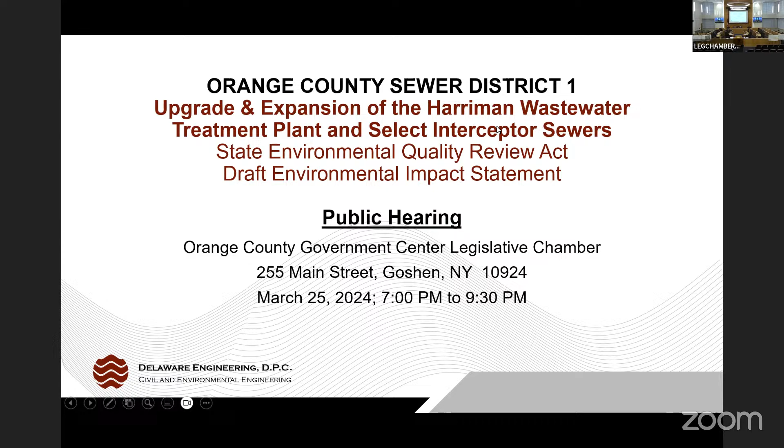So my name is Mary Beth Bianconi. I'm a partner here at Delaware Engineering, working with the county for about the past decade, evaluating the wastewater treatment plant that is part of the Orange County Sewer District Number 1, located at 71 River Road in Harriman, as well as portions of the collection system owned by the Orange County Sewer District.

We're here tonight to conduct a hearing on a draft environmental impact statement, copies of which are here in front of us. This is the text, and then there are two appendices. The document is well over 3,000 pages long and represents years of study and effort, and has been reviewed by the legislature and is ready for public review tonight.

Tonight, we'll walk through the state environmental quality review process so we can understand what that is. We'll discuss the proposed project. We'll describe the draft environmental impact statement, and then also discuss the comment process that we're in at the moment.

So the State Environmental Quality Review Act is a process through which projects that may have an impact on the environment are evaluated before they occur. The purpose is to describe the environmental setting of the proposed project, identify environmental impacts, mitigation measures that reduce or eliminate potential environmental impacts, explore alternatives to the proposed action, and establish a framework under which the project may advance to construction.

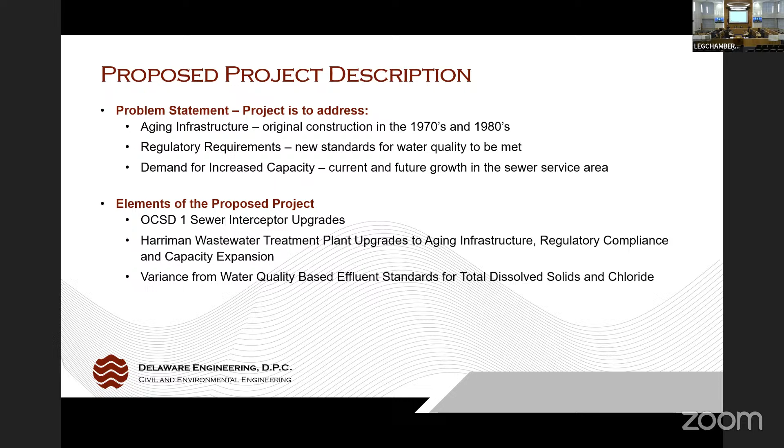The treatment plant was built in phases. We do have an image of the treatment plant here in the room—if anyone can see it, should we stop?

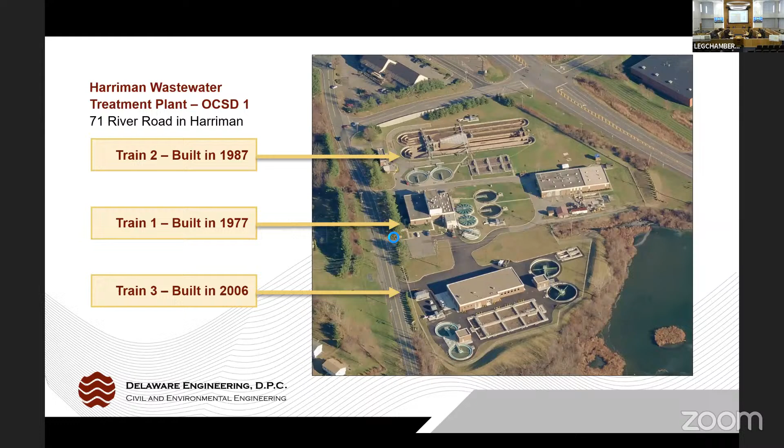We're ready. Thank you. Yep.

So we were just discussing that this is the Harriman Wastewater Treatment Plant at 71 River Road in Harriman. The plant was built in 3 phases, with Train 1 in the center, built in 1977, and Train 2 at the top of this image, built in 1987. The difference between 1977 and 1987 was the addition of some communities to the service area, the Moodna communities, so additional capacity was necessary. Each of those trains was constructed as a 2 million gallon a day train, so by 1987 this was a 4 million gallon a day facility.

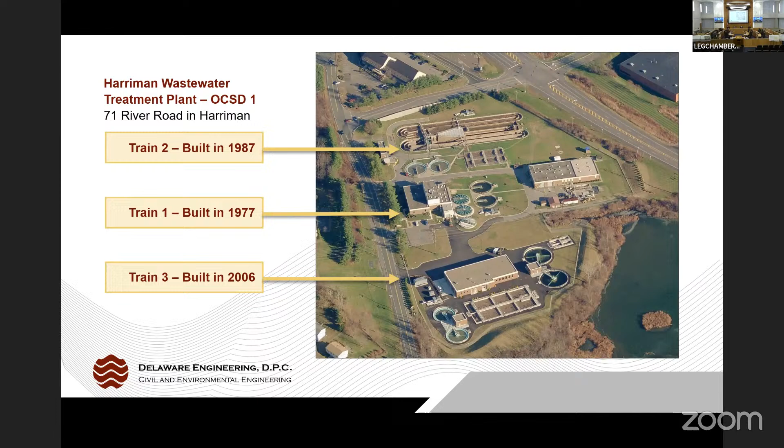Then about 20 years later, in 2006, an expansion was built, at the bottom of this picture, which added another 2 million gallons a day. One of the things you may notice from this image is that there are 3 different types of technologies that make up the wastewater treatment plant on this site. That's a little unusual, but today the capacity is 6 million gallons a day. The other thing I'll point out is that the space between Train 1 and Train 3 is actually utility right-of-way, which adds a little bit of complexity to working on this site.

In 2020, the permit that governs the quality of the water treated at the wastewater treatment plant and discharged to the Ramapo River was updated to include new requirements for treatment. This is a pretty long list, but I'll summarize it to say that some of these treatment requirements have to do with the biological process at the wastewater treatment plant and its ability to consume organic matter. Some are relative to the ability to reduce the amount of nutrients being discharged into the water, so things like nitrogen and phosphorus.

Some of them are for constituents that we typically find in groundwater in the area, particularly in our hard groundwater.

So those things would include something called total dissolved solids, abbreviated TDS, and chlorides, which are a constituent of total dissolved solids. In addition, the permit was updated to include the state's mercury minimization program, which is an element of all wastewater treatment plant discharge permits these days. A number of other monitoring requirements, including whole effluent toxicity testing, were added to ensure the wastewater discharged from the plant isn't toxic in the environment. There were also some other administrative improvements to the permit, as well as additional sampling.

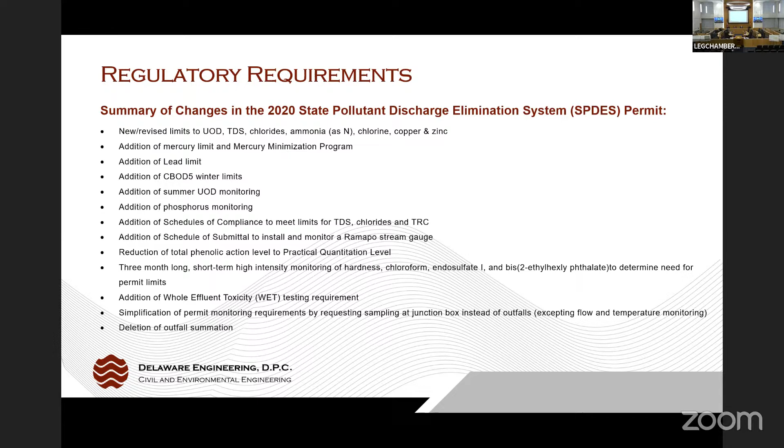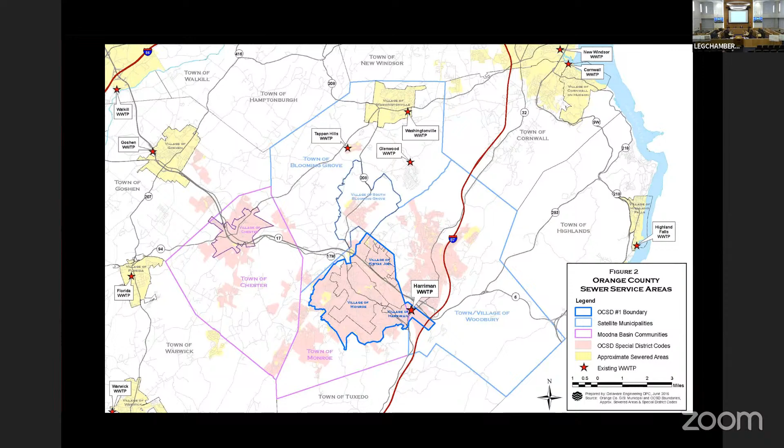This image is generally the service area for the Orange County Sewer District Number 1. The blue area in the center is the actual sewer district, which is a county district. The pink areas are also served by the county's wastewater treatment system but are outside of the sewer district, served on a contract basis. The yellow areas you can see are other wastewater treatment plants in the area.

The project is in part aimed at addressing demand for wastewater in the service area that was just shown. I realize there's a lot of material on this chart, we're not going to spend a lot of time here, but a number of different methods are used to determine additional sewer demand. Among those is polling the communities served to ask about any known or likely increased demands in sewer over a 20-year period.

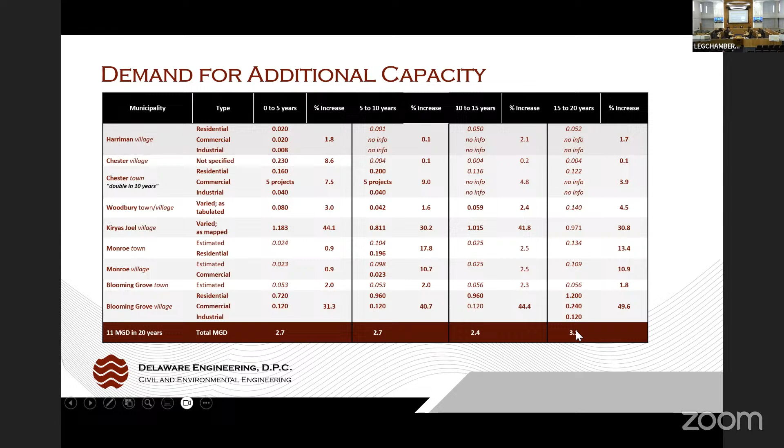That's our planning period. As I mentioned, the wastewater treatment plant's been upgraded about every 20 years, and we're in that cycle. In addition, we have planning factors we use when looking at things like land use, the amount of land available, the availability of public water, and environmental constraints such as wetlands and steep slopes. One of the things you see down along the bottom of this image is that out 20 years, we're looking at a demand of about 3 million gallons a day.

So the proposed project, as I mentioned, has two pieces: the wastewater system. One is the conveyance of wastewater to the wastewater treatment plant, and the other is the treatment plant itself. This particular part of the project description deals with that conveyance.

So the idea here is that under current conditions, we conducted modeling and we see that under rainy conditions, because we're getting some rainwater into these pipes, those pipes are very much at capacity. Right now that's not resulting in any issues, but in the future, as we see increasing sewer demands, that hydraulic capacity, the ability of those pipes to pass water onto the wastewater treatment plant, needs to be increased.

These increases you see, that 60-inch pipe and that 48-inch pipe, are intended not just for the 20-year planning period, but really to the maximum extent that we believe the Harriman wastewater treatment plant could receive this wastewater. So this is a very forward-thinking aspect of the project.

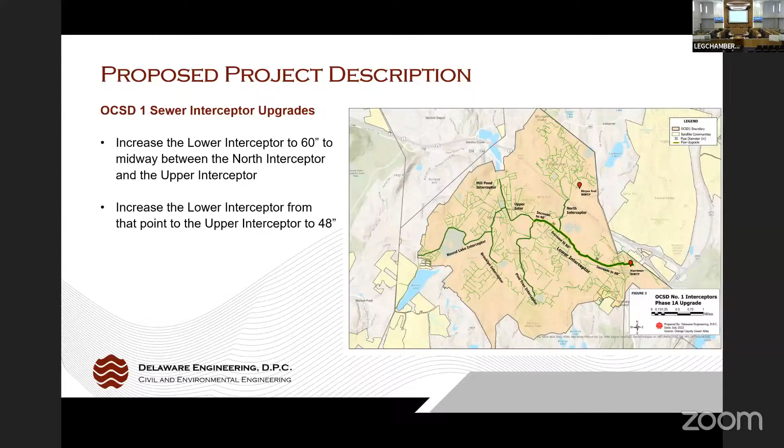One thing we will note is that you can see these pipes do go through our communities, they are on roads, and this type of construction is pretty disruptive. So the concept here is to do this upgrade at one time rather than slowly over time, which would be more disruptive to the communities.

This is the other portion of the project. I recognize this image is very small. There are copies of it in the environmental impact statement, as well as here in the room. These are the upgrades that are proposed at the wastewater treatment plant itself.

I'm not going to go through these in tremendous detail, but the upgrade intends to take what are currently trains 1 and 2, which currently handle approximately 4 million gallons a day, and upgrade them to be a 7 million gallon a day facility using a different technology, one that the current plant staff is very familiar with and comfortable with. This would meet the regulatory requirements other than total dissolved solids and chloride, and would allow some flexibility for future expansion of the facility as necessary.

There would be some other improvements made here on the site. One that I will point out, largely for the public, is that odor control improvements will be made on the site.

In addition to that, longevity improvements to extend the existing structures that will be reused, and equipment that will be used, so that we extend its useful life and continue to reuse existing equipment and facilities.

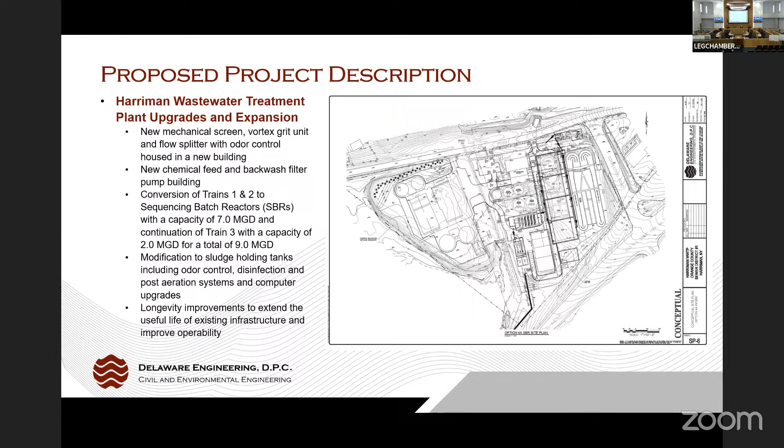Another important component of this project is the variance from water quality-based effluent limits. As I mentioned, in 2020 this plant received a new discharge permit, which determines the level of treatment for wastewater before it's discharged back into the environment to be protective of water quality in the Ramapo River Basin. The new permit included two constituents not previously present: total dissolved solids (TDS) and chloride, which is actually part of TDS. Those permit limits are 500 milligrams per liter for TDS and 250 milligrams per liter for chloride.

In order to treat for these, our existing treatment systems, our biological treatment systems, and our filter systems that we have on site and that we're proposing, do not remove or reduce them. In order to do so, we would need to construct something called reverse osmosis, which is another type of treatment at the plant. We would treat a portion of the water that comes to the plant.

The proposal for a reverse osmosis system has a very high capital cost, about $96 million, and excessive operating costs at about $25 million a year, which would be for handling high electricity as well as the reverse osmosis process resulting in a byproduct, a brine, that would have to be shipped off site for treatment.

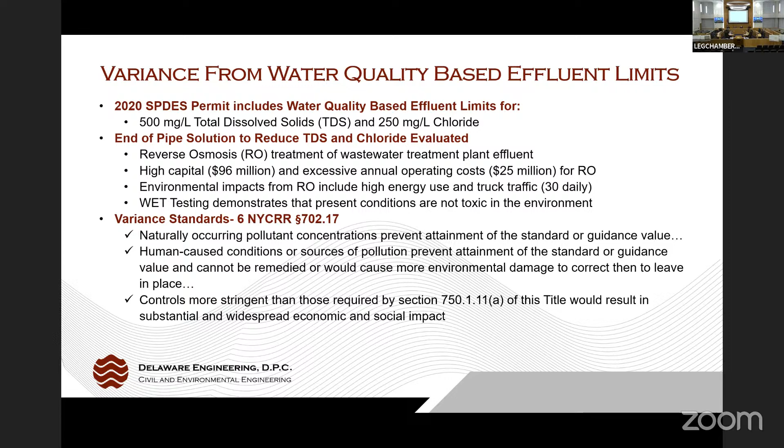Schedule and cost. Our present schedule has design being implemented from 2024 through 2026. That sounds like a very long period of time, but this is a very complex project. In addition to design, the project will need to be financed, and the county intends to seek low-cost loans and grants, money that does not have to be paid back, to reduce the cost impact of the project. The permitting of this project will also be complex, so it's a couple-year time frame.

Bidding of the project, which is certainly large enough to require public bidding, would occur likely in 2027, and construction and startup would be hopefully sooner than 2029, but for these purposes we'll predict this out to 2029.

Our capital cost estimate in 2025 dollars for the sewer interceptor upgrades we mentioned, the 36-inch pipe and 30-inch pipe going to larger size pipes, is about $44 million. The Harriman wastewater treatment plant upgrades for aging infrastructure, regulatory compliance, and capacity expansion is $156 million in 2025 dollars. That does not include the $96 million for reverse osmosis, since we're proposing to receive a variance for that, for a total capital cost in 2025 dollars of just short of $200 million. The new cost to operate this facility—many of the costs will remain the same.

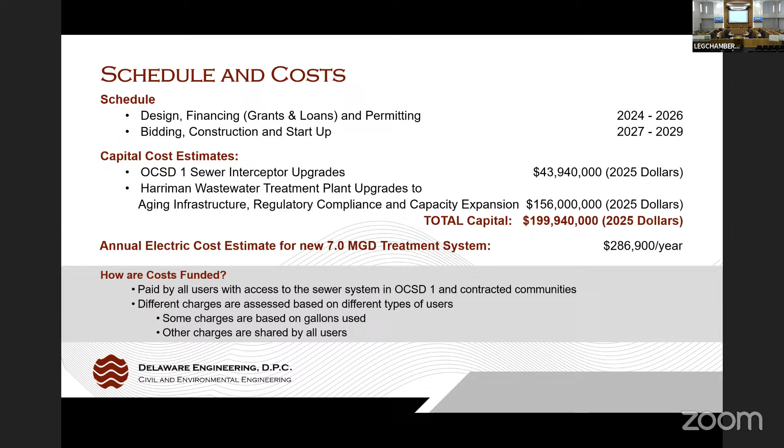How are these costs funded? These are paid by all of the users with access to the sewer system in the Orange County Sewer District Number 1 and the contracted communities. Some of these charges are based on gallons used, and others are shared by all. As the project moves forward, there'll be more information regarding how the project will be funded.

So the draft environmental impact statement, this very large document that we have in front of us, what does it do? It identifies a number of potential environmental impacts as well as mitigation measures to reduce or eliminate those impacts as much as possible. I'll run through these relatively quickly, and if folks have comments, we can talk about this in more detail.

The project is proposed as a multi-year construction project. So the potential impacts of that would be things like stormwater, construction traffic, noise, those kinds of things, particularly in the neighborhoods where the construction is occurring. Mitigation measures would be stormwater pollution prevention during construction, limiting the hours of construction, providing traffic controls, and the like. Water quality impacts.

Again, stormwater impacts from construction from opening the ground can be significant, as well as this is an area with a relatively high water table. So to the extent that we are building tanks down deep in the ground, we will need to conduct dewatering, and we will have to control stormwater and dewatering during construction. There are numerous design standards, and there are the discharge standards that we previously mentioned regarding water quality impacts that are intended to reduce or mitigate those.

And then very significantly with respect to the variance for total dissolved solids and chloride, one of the requirements of that variance will be a minimization plan. Those will be ongoing efforts conducted by the county sewer district to reduce the introduction of total dissolved solids and chlorides into the waste stream that comes to the treatment plant.

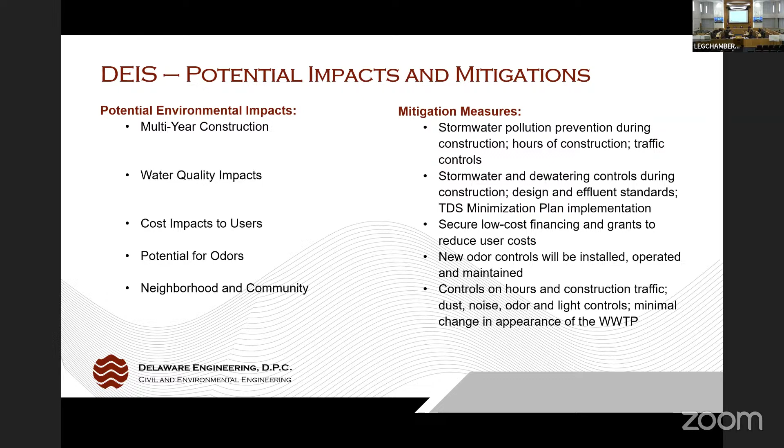And then in terms of long-term impacts, the project does not propose to substantially change the appearance of the wastewater treatment plant, but will improve operations, particularly with respect to odors.

We're getting towards the end of this. The draft environmental impact statement, one of its important aspects is it identifies alternatives to the preferred program. And these are the alternatives, and I'll spend a minute running through them because it's important to outline them.

One alternative that is required to be evaluated for all environmental impact statements is the no action alternative. What we're doing is comparing not doing anything to what would happen if we did. Not doing anything would result in a failure to achieve regulatory compliance, and additionally the breakdown of aging equipment, because longevity improvements are part of the project. Not doing anything would not address the existing hydraulic restrictions in the collection system that could, if left unaddressed, result in the discharge of untreated water into the environment. And lastly, not doing anything would result in the failure of the sewer district to meet its obligations with respect to sewer service. So the no action alternative does not achieve the project's objectives.

Longevity improvements only would have some upside. It would extend the useful life of existing equipment and facilities, and it would meet regulatory requirements provided a variance was also issued, as is part of all of the projects that are proposed. However, longevity improvements only would not increase the capacity of the facility and would be a failure of the Orange County Sewer District Number 1 to meet its obligations to provide capacity for its serviced areas.

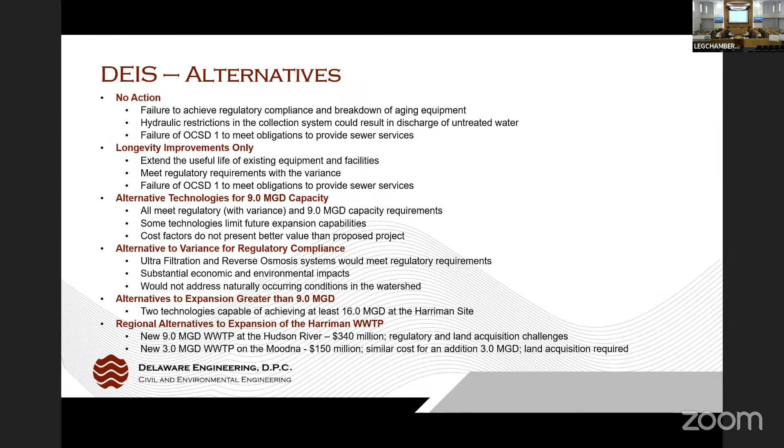As mentioned in the reading of the hearing notice, we have paper copies of the environmental impact statement presented at all municipal offices in the sewer service area. There are paper and digital copies available at the public libraries, and a paper copy located on the second floor of this building in the legislature's office. There is a digital copy of the draft environmental impact statement on the county's website. Lastly, I encourage everyone, even if you speak tonight, please submit written comments either through the mail or by dropping them off at the Government Center, 255 Main Street, second floor, Goshen, New York, 10924, to the Clerk of the Legislature, Jean Rampin, or submit via email to jramppen@orangecounty.gov.com. Thank you.